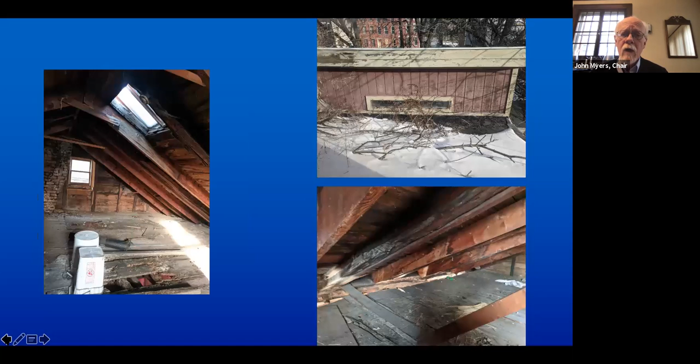Was any consideration given to limiting the demolition to the rear portions, which are certainly well beyond any sort of reclamation, with the notion that the original front section could be, I guess, stabilized and then marketed?

Unfortunately at this point, because we already did a stabilization, doing a partial demolition, and since both the front and the rear of the building really are greatly affected, I think that front facade becomes something that's insurmountable for most people when they look at it. We don't believe that would make the difference to give this a viable pathway.

Okay, I'll ask other commission members to comment on the application.

How often does the land bank inspect its properties? It says the roof hatch was open and not closed in the winter of 2018, and not closed until spring of 2019. Does the land bank look at its properties regularly?

Yes, we have a regular schedule of going through properties. I'm not sure where those exact dates came from. Obviously, if we're made aware of a situation or we find something, we would correct that immediately. We don't have any intention of leaving those things that way.

So we assumed that there was deterioration from the winter, but that's not necessarily an exact date. But what did happen at winter is we did bank these properties to look at possible projects for a larger section of the south end.

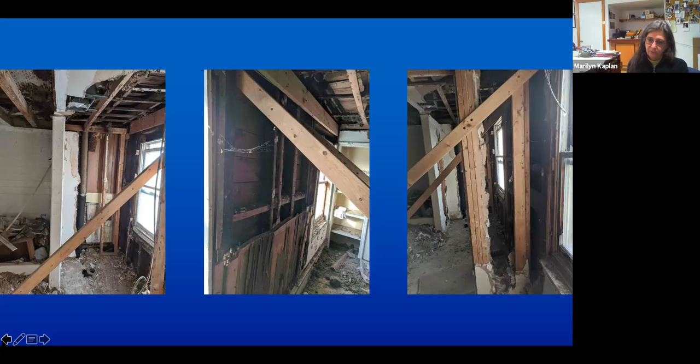Because if you had a $150,000 project here, and you were able to use some of those funds through the South End Improvement Corp, there's $80,000, you had $50,000 from the city, you've got some tax credits, all of a sudden you've got a project and you've got some assets that the owner is building up.

I can speak to that spread, and that is exactly where it comes from. The lower end is with the sense that an individual would take on this building and go down that path where they put together different resources or even their own resources. The higher end of the spread comes from our experience when we pay for things. Unfortunately, the reality is if the land bank does it, it costs more money. That's just what happens. We understand that. And we know that if we do a full rehab on a building, it will cost us more money because we have a higher overhead.

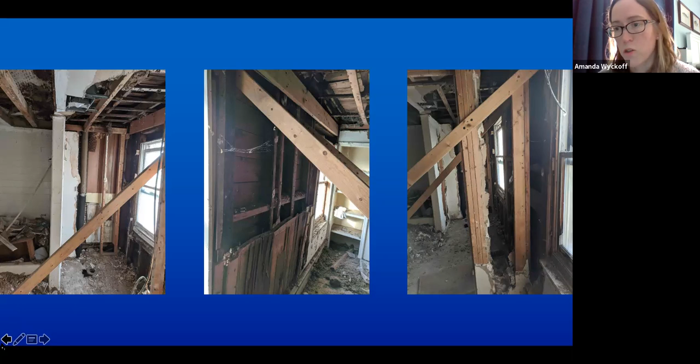We're going to be hiring a GC to do it. We can't do all of our construction project management in-house. So if we were to do it all the way to the finish line, we're going to be at that higher end. But if somebody else can take it on, they can do some of it sweat equity, do some of their own work themselves, and not have to go out to bid in the regular market, then we agree it could be done cheaper. But we don't have that person, we don't have that partner to walk that path with.

Do you have to pay prevailing wage rates on your projects? We do not pay prevailing wage, but our projects consistently come in more expensive than what other folks can do. They're doing a lot of their own project management, or if they even do parts of the job themselves, they can save a lot of money.

Has the land bank done... I get that what we're looking at from CTML is a prioritized conditions assessment. I believe Historic Albany worked with you maybe on a conditions report. Are you in possession of a prioritized rehab plan or condition report with priorities for repair?

Because I'm going back to, I don't know, it'd be interesting to know how much was spent on this temporary stabilization on the interior. You're looking at the demolition cost, and to Marilyn's point, this was a little bit of the issue systemically, which I know you're not responsible for, but we're talking about full rehab cost. Has the land bank done anything besides this temporary stabilization, which isn't going to help a future owner, to improve the condition of this building, to invest something to stabilize the building somewhat?

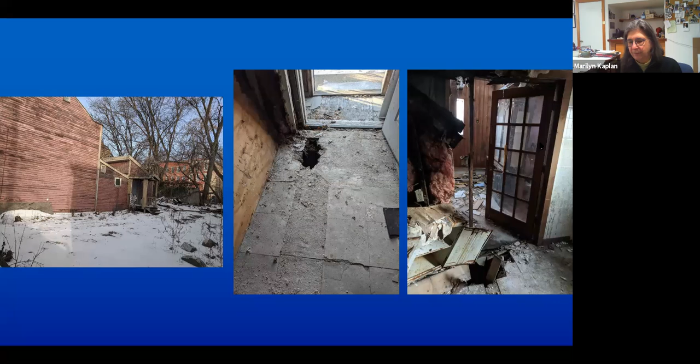It's just a recurring problem, and I don't think I'm ready to let it go based on the information I have in front of me. I think we can do better collectively, and I don't think we're there. I think we're just working too independently and too narrowly. It's a real problem for you all, I get that, but that's a lot of money to demolish a building, and then we don't have the building. So how else can we maybe use that pretty substantial amount of funding to get us over this hump?

So I guess I have a motion in there. I don't.

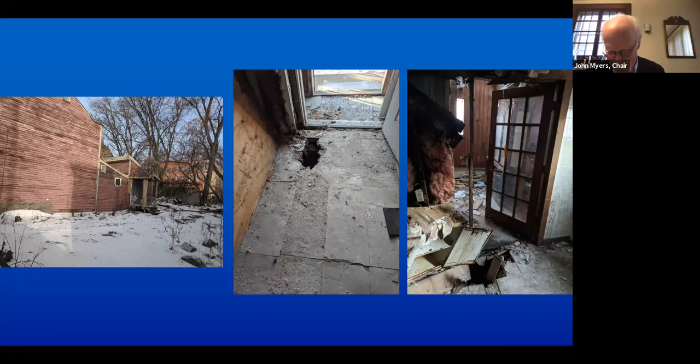I would just reiterate that we are always more than happy to work with anyone and everyone. This was part of a walking tour we did with Historic Albany, as an initiative to come up with other ideas. We're open to ideas. If someone is interested in this building and wants to take it on, we can start that conversation. But at this point, we've had no one step forward.

I think what I was hearing from Marilyn, and what I feel too, I want to second Marilyn's appreciation of your work and your job. But I think it's clear that what's been happening with marketing this building is not working. So to her point, look at the cost of demolition that the land bank was going to invest, and what can be done, because leaving the building as it is, it doesn't look like anyone's interested, and doing something to fix the ongoing dynamic deterioration that's occurring.

Is there something that can be done? Is there a resource that we here don't know about that can help solve that internal roof drain problem? Can you put a new roof on it? Can you get into the building? I understand there's unstable floors, but can you clean out what you can clean out? Make it presentable and invest money in something longer term, rather than bracing that will eventually have to come down and add to the cost of whatever the future owner will need to invest.

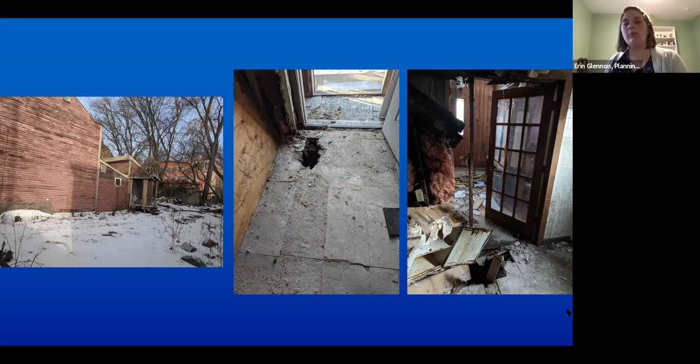Interesting. Erin and Brad, what about the vacant buildings funds that the city has, through ACDA? That's the one that I know of. I don't know if there's any other sources. I know that they have it. Do you want me to talk, Erin?

Go for it, Faye. Hi, it's Faye from ACDA. We have 2 grants remaining for that program, but it's not a stabilization grant. So if somebody applies to us for funding to use that $50,000, they have to be able to show they have the remaining funds available to restore the building to a livable situation.

Well, we need to move this application to some level of conclusion here. Somehow it's made it through the winter, so there's some time. I'm not sure what the emergency is that it has to be torn down in the next week or so.

I'm sorry, are you asking the question? I'm just observing on it. Does it need a vote, tear it down right away? Or do we have time to look at this a little more?

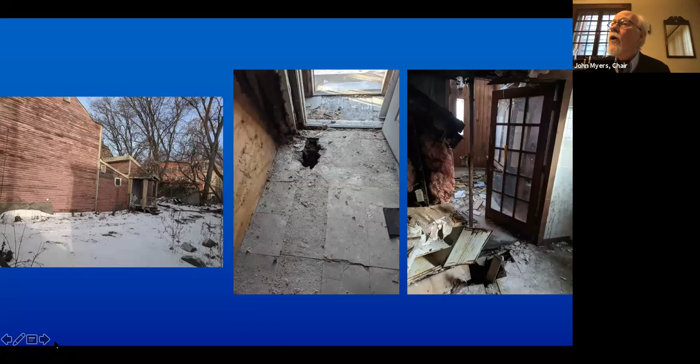Okay, the next item on the agenda is 78 Clinton Avenue, 133 Clinton Avenue, 303 Clinton, and 307 Clinton. The Home Leasing partnership certificate of appropriateness for the rehabilitation of the 4 vacant masonry structures.

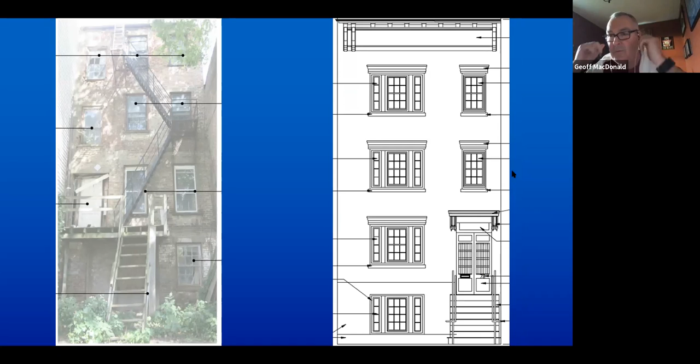The front stairs will be replaced. One of the big topics you may recall from last time is the windows. All these windows, contrary to the original project, are the original wood windows on the street facade, and we will be retaining, repairing, and restoring them for this project. These buildings are all going for tax credits through SHPO and the National Park Service.

I think Aaron's scrolling through — each building is either 4 stories or 3 stories with 3 or 4 units each. That's in essence the gist of each of those. In the packet, there are also facades on the back that we're going to handle with replacement windows. I believe the committee was okay with that last time.

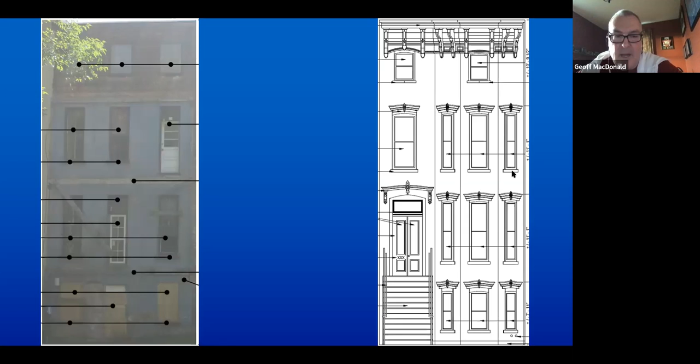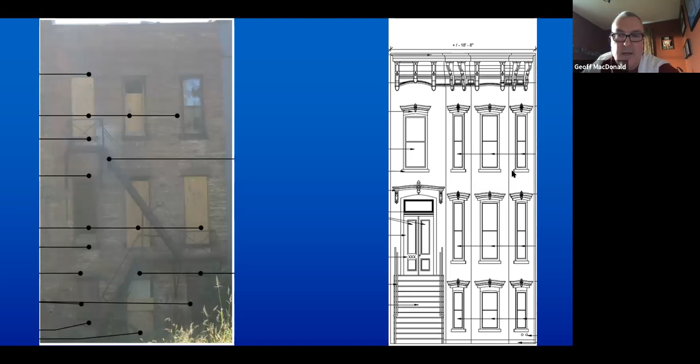In some cases we have to demolish even part of the existing structure because it wasn't original to the building and is in terrible shape — removing the existing fire escapes, as shown in the pictures on the screen now. I know I went quickly, but that's about the scope of work at this time. We'll obviously work with you on the paint colors, which will be original or relate to the historic fabric of the building and the street.

It's certainly encouraging to see the restoration of this large number of original windows. Yeah, they were in pretty decent shape. We obviously have a preservation consultant recommending this to get our tax credits — we're going to need to do that.

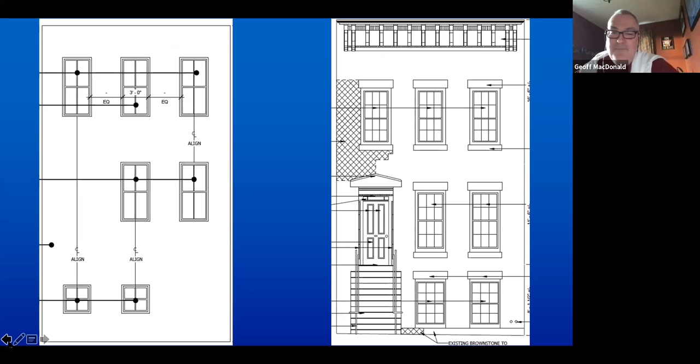In general, hopefully you guys have seen the original project — even the painting and the work done on those is really a stark improvement, looking quite nice. Yeah, we're pushing to get done. What's the status of these now relative to the state and the Park Service?

If I speak out of turn, let me know — I know Part 1s are in. I believe the Part 2s are in, or if not, they will be shortly; they haven't reviewed them yet. Okay, we can get those to you. No, I was just wondering if those reviews were complete.

Oh yes, sorry, gotcha. But you're suggesting the scope of work for each of these is very similar to the other 70-odd buildings, with the exception that we've got more original windows here. Correct, pretty much identical.

Also, on these 4 buildings, you're replacing the wood stoops or the wood stairs. Correct. And are any original railings being retained, or are they all new railings? I believe they've already been replaced — if I should know that, John, I apologize, I'm looking at my drawings on my other screen. If they're original, we'll certainly try to keep them, but I believe they've been replaced.

So those were replaced in the past — sorry, and these will be all new if I misspoke. Right. Aaron, do we have stair profiles, details, and examples of railing for the project, just to verify the detailing of the stair and appropriate nosings and that sort of thing?

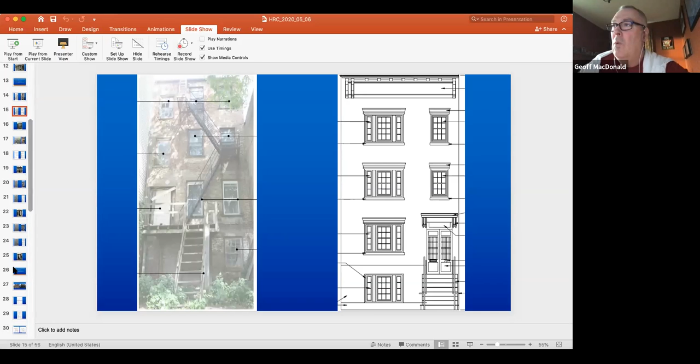So why don't you bring up 165. 165 is a little bit of a different creature, though we are going through the same process in terms of national park tax credits. The exterior will be maintained as is. We're calling to repoint and basically restore and renovate the whole masonry facade.

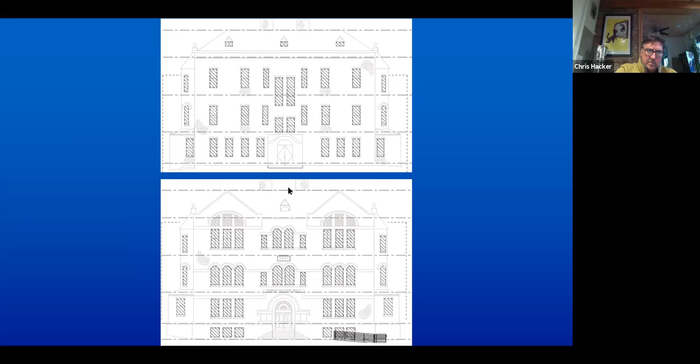You'll see one thing I'd like to talk about, where railings may come in. We do need to provide handicapped accessibility, and we actually considered it a plus that you can see on the image on your screen now. There's some railings down at the bottom right corner, providing access to the basement. We're also providing an elevator within this building. This building is 3 stories with a basement.

It's not a huge footprint. We'll be providing 12 units in there. Even the inside is a center stair, and each of these units incorporate the existing classrooms, which are kind of open spaces. So we've tried to utilize the building the best we could, take what it has to give, as we say. But you can see the railing, back to the handicap accessibility.

We thought this was a good advantage that we're not plunking a huge ramp on the exterior of this building, that we're able to recess down into the sidewalk and come around the side of the building to get in at the basement level to access our elevator. You can see in that same elevation at the bottom of the screen how many steps there would be to get into this building. We weren't even sure if it was going to be feasible, and we discovered this access, so it's really worked well.

Now those railings, I think we need to be in context. They'll have to be new, but we can get an ornamental style, historically appropriate railing that we would provide at that location. And then I think the next topic would be the windows.

Now, the difference with this building is these windows have been removed. The original windows have been removed and replaced with an aluminum replacement window. What we're proposing here too is to come back with a aluminum-clad wood window on this building, same profile, same arches, same look that the building has now, but just in aluminum with a wood interior, insulated modern window.

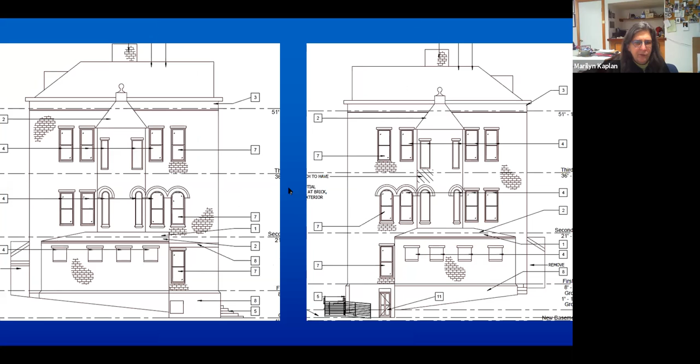About the windows, one question: you've got square head windows into those arched openings, including on the south facade. That's not what's existing now, right? Is there any reason? I know they're more expensive.

And I guess a couple questions on that. One is, can you save the original windows that are there, since they are arched head? All the windows there are aluminum replaced, and those that appear as arch heads are actually square on the interior. They don't fit the arched openings.

So they're in behind the brick. Marilyn, if you go by the property, you can see the windows don't conform to the fenestration opening. As Mike said, they're square tops set behind the actual original plane. Well, it's not what it looks like on my little laptop. I'll go by and look.

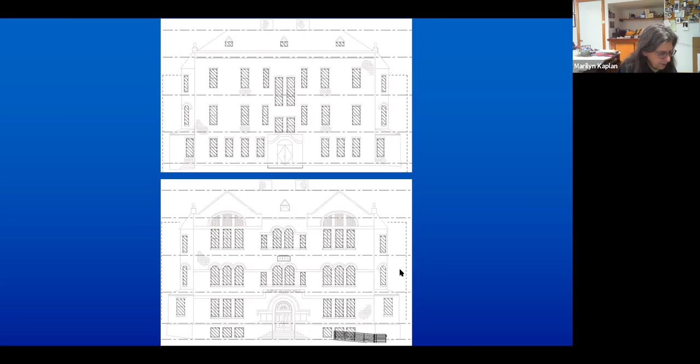Can you zoom in? I can't. Yeah, you're on a PDF. I can, but it looks like they're round head in my viewing. They may, just to be clear, and Mike might know this - we've looked at it, but the front ones might actually be round. On the side, they're square. The goal is to replace these with round. Last we spoke to the owner, maybe Adam can confirm, but I believe that was the game plan.

That's good, but that's not what the elevations show, correct? The front does, I think. Maybe it's misrepresented - it looks a little odd on the side. It may just be a graphic thing, honestly. We can confirm that. I've got a close-up photo of those arch openings, but since we're going back with true arch tops, I don't know that it necessarily matters that the replacement windows don't match the openings.

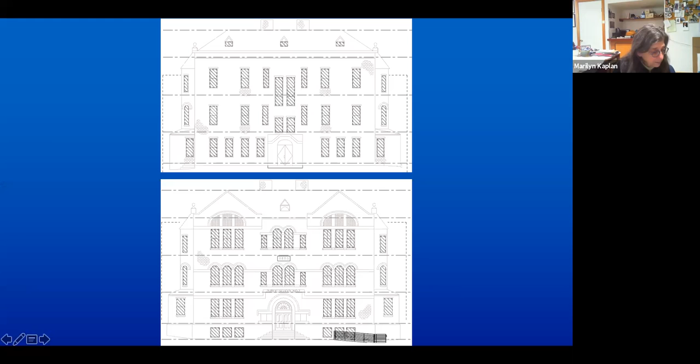So the front elevations, the arched openings will be maintained, yes. That's not what I'm looking at - what sheet? I gotta zoom back out. A200. It's not, maybe I'm reading it wrong. Those look square head to me. You mean that little line? It may just be a graphic.

Let me just check that. The other question I have for you - I think the reference would show up on plan, but I don't have the plans. What about the vents? What's the heating per unit? Is that why? Yeah, they're separate units, we'd run everything up through the roof.

Again, we have to deal with National Parks and SHPO - there'd be nothing exposed on the facade. So the small new exhaust vents added to most exterior walls - it said I would pick it up on the plans, but I don't have the plans. So what does that mean? Small new exhaust vents added to most exterior walls. Oh, you're looking at an elevation - your general exterior scope of work notes.

That may have been a rogue note that slipped through. I'm gonna have to fire somebody for that - she might be listening right now. Sorry, which note was it? A200 general note, number 2.

You might be looking at an old elevation, actually - we updated these, so that may have slipped through. You may not have this updated version; I apologize, these are May 1st. Oh, demo - you're looking at demo. No, well, I don't know. It says north, it's A2. My 200 doesn't say that - my number 2 on my A200 says fire escape to be removed.

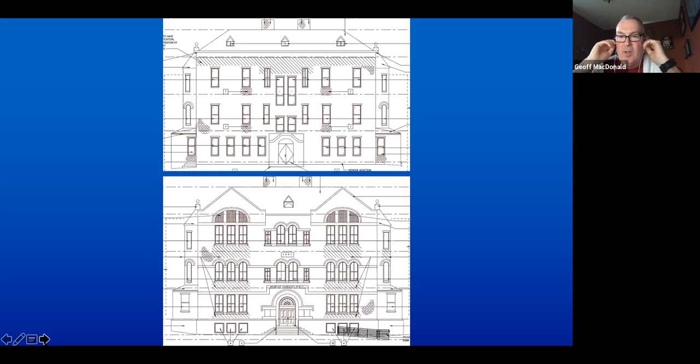So no, there would be no vent - the short answer is there'd be no added new vents on the exterior of this building. I think what Marilyn is referring to is not the keyed notes, but the general exterior scope of work notes, number 2: small new exhaust vents will be... Oh I see, yeah, no - that's a general note that should come off of here. Apologize, it's applicable elsewhere, being general, it slipped through.

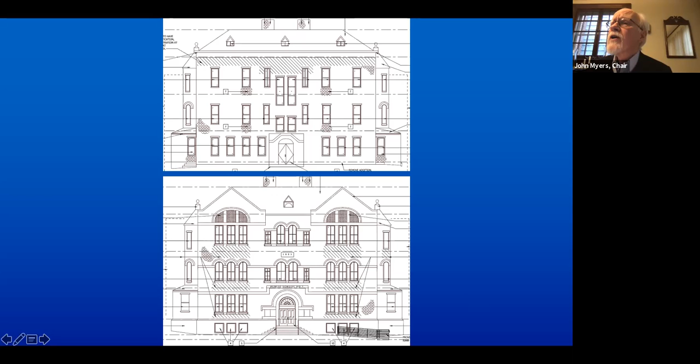So are those vents being gathered and sent up through the roof of the back building? Yes, correct. And there's actually a flat roof on top - another opportunity too, there's those two brick chimneys you see that are wide open and unused. We're thinking about using that for duct chases to do that kind of work.

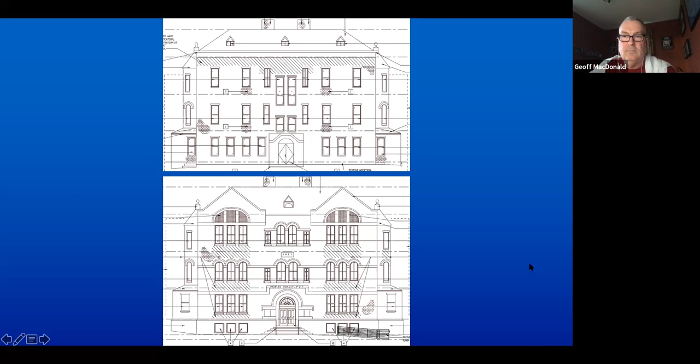Any other questions? The schedule on these, like the other ones we saw, the part twos haven't gone to the state yet?

I believe so. Mike, can you confirm? That's correct. They're still drafted, but as we've been issue spotting while the drawings have been developed, we've been consulting with SHPO to make sure we've got the cleanest submission when it's formally submitted.

What will you typically do relative to taking on the exterior construction in this case, or any construction, relative to just having a preliminary part two approved, or do you go ahead and keep your fingers crossed? What in general have you done relative to the proposed works, the part twos?

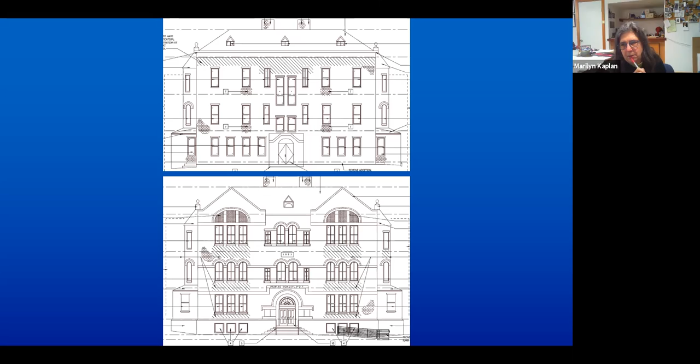Is that for me? Mike, correct me if I'm wrong, but I think we've done enough work with them that we'll proceed with our best understanding. With Mike's guidance, there's nothing... well, to say there's nothing, we have a pretty good understanding of what their expectations are from us, and we'll proceed in that manner.

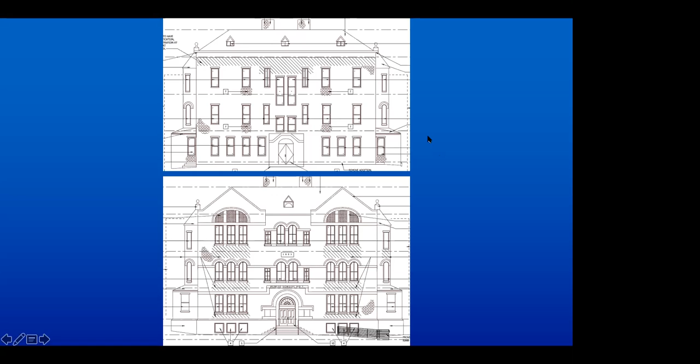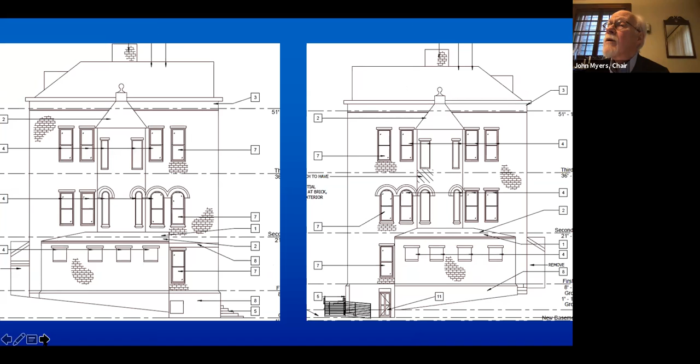But Marilyn, I don't think I understand the question, can you rephrase it? And those arched openings... That's right, I was looking for that. So all the new windows in the building will fully fill the masonry openings, correct?

And be set at the plane where they currently sit. Yes, okay.

And all of the areas of repointing, have you done mortar analyses and are matching the mortar? We haven't done it yet, John, but we will. It'll match the mortar color, makeup, have the sand tested, and same composition and strength. Yep, you got it.

I believe it's cement, which surprises me. I thought it would be lime putty, and it may be actually, but we'll have to get it tested.

Was the building painted originally, or was it stained? It looks like it might have been stained, and were the joints a red stain as well? I don't think it was stained - on the brick, I think that's just weathering. Don't believe it was stained. Mike, you can correct me again if I'm wrong on that too.

It does all need to be repointed. Some spots it isn't so bad, other spots we're losing mortar. Yeah, it looks like some foundation repointing is in order too. Or some stone replacement in a few spots.

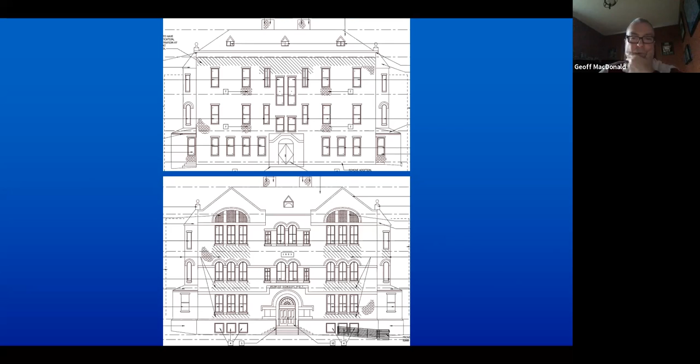Aaron, would you go back to that south elevation? The photo? Yep. Oh, you can't zoom in.

Mike, did you not see any evidence of red iron oxide staining or anything? Is the mortar tinted? I didn't see any evidence of it when I was on site, but I could have missed it. Looking at the photo, from the 1880s or whatever, it sure looks like the brick might have had a red iron oxide stain, and or the masonry have tinting. I'll have to look at it. Have you looked closely at that? Do you have that all figured out yet? I have not.

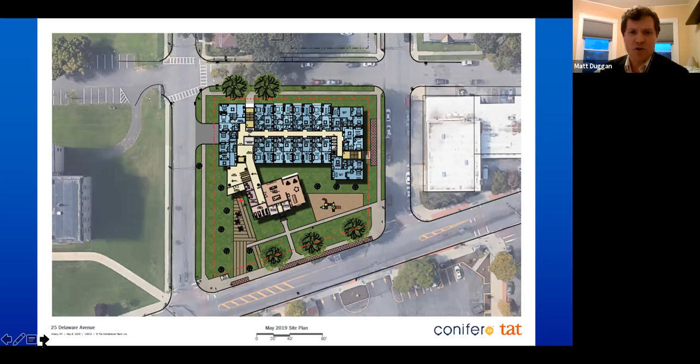So if we go to the second image, you can now see, or go back one, the site plan of the revised scheme. The big move we made was to reimagine how you entered both buildings. Instead of having a link building connect the two and provide an accessible entrance to the fire signal building, we're now entering the fire signal building from the west side, which is historically the rear of the building, and entering the new building from that same path. So essentially right down the center of the block we're creating a new path accessed off Morris Street, with an entrance into the residential building.

And as you continue further down, it would have an entrance into the fire signal building. What we're now providing is our accessible connections between floors will be within the existing fire signal building. Another thing you can see from this site plan is that the playground, previously shown on the front lawn facing Delaware Avenue, has now been tucked between the two buildings, essentially in the location where that link building was previously proposed.

Another important change you can see from this image is that the overall footprint of the new building has been reduced, one by eliminating the link, but also there were specific comments from the commission last year that the old design was actually a bit of an L-shaped design, coming along Morris Street towards Delaware Avenue. That has been eliminated, although that area is now where the entrance is shown.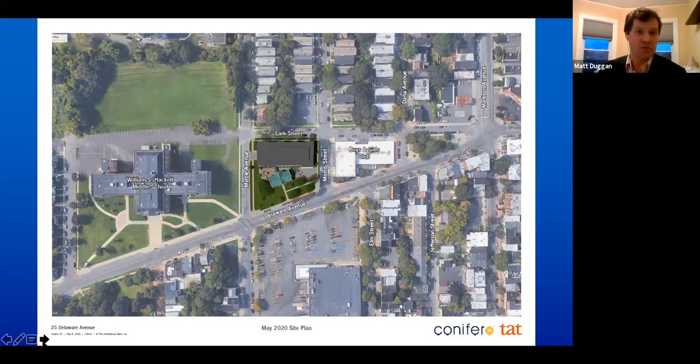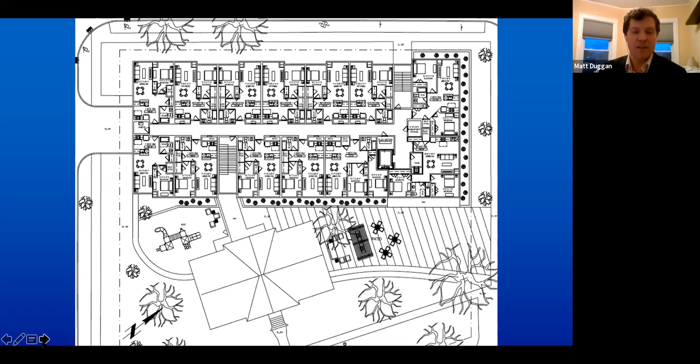The next image shows the 4th floor of the building, so you can see generally how it lays out. The elevator has moved over to that entrance, and there's an open covered connection roof, just a canopy, connecting from a secondary entrance of the residential building to the primary entrance of the fire signal building, which we'll see further in a perspective view.

If we go ahead one more slide - this is the corner of the building from the previous design from last year, right from Morris Street by Delaware Avenue. You can see the playground was previously in that front lawn, and you can see the L-shaped leg of the building.

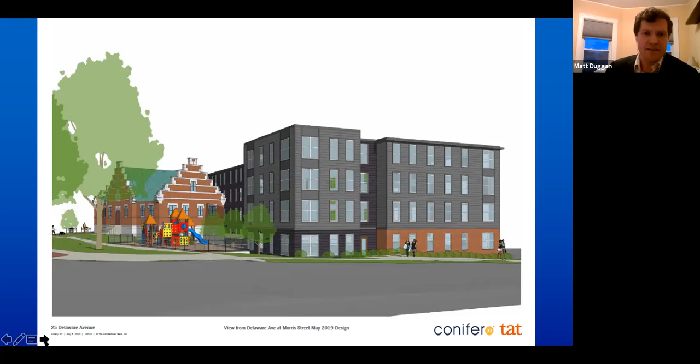If you go to the next image, you can see how we've redesigned this end. From here, the Boys and Girls Club is just to the right, and if you zoom in a little further, you can go forward one more and zoom in right to the entrance.

So we're on Morris Street, and this is that mid-block path I was talking about. To the right, that is the main entrance to the proposed residential building. You can see a decent amount of glass on the ground level, as well as brick, and that is where the leasing office and management office would be. A little further down, you can see a double set of doors that look brown, representing wood and glass - that's the front entrance to the building. The fire signal building is to the left there.

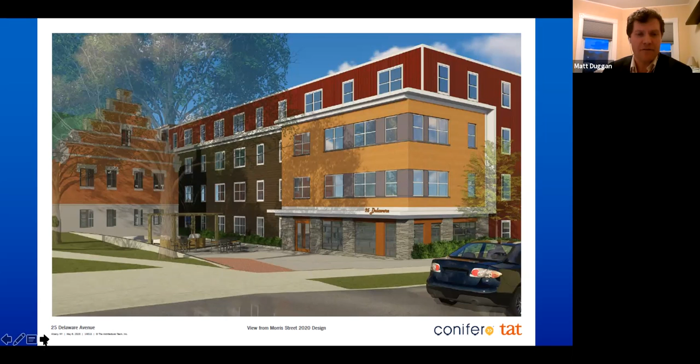Go one more forward. May I interrupt for just one moment?

Erin, did you call Erin Tobin? Yes, I did, she's back on. Oh okay, I'm here, I'm sorry. All right, you're hiding off the screen here. Okay, please resume, I'm sorry.

So what's proposed below is a parking garage, and that parking level is exposed on Myrtle Avenue and right at the corner of Lark, so that vehicles are able to drive directly in without a large ramp. What you can see to the left, again that kind of orange colored zone, is that front entrance we were looking at in the previous slide.

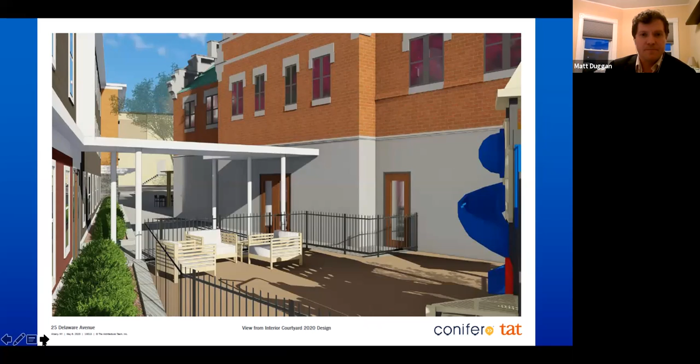So here are the elevations of the building. You can see the upper right corner would be the east elevation from Delaware Avenue, so you can see the fire signal building in the front. You can see here that it really presents itself as a 3-story building from Delaware Avenue.

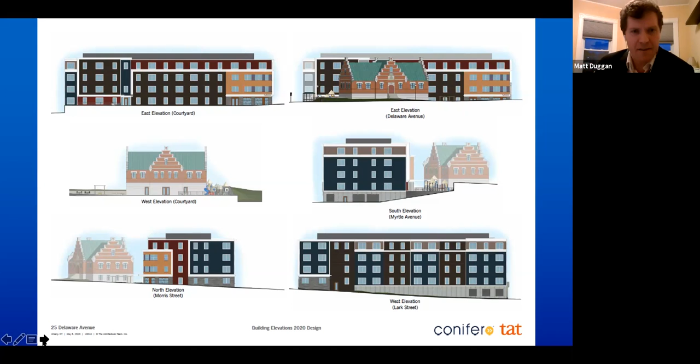Just to the left of that is that same elevation, but now cut through what we're calling the courtyard or the internal path. You can see where that blue section is and where the banding drops down 2 levels. That's the secondary entrance into the residential building, which is directly opposite the accessible entrance into the fire signal building. Just below that is the west elevation of the fire signal building.

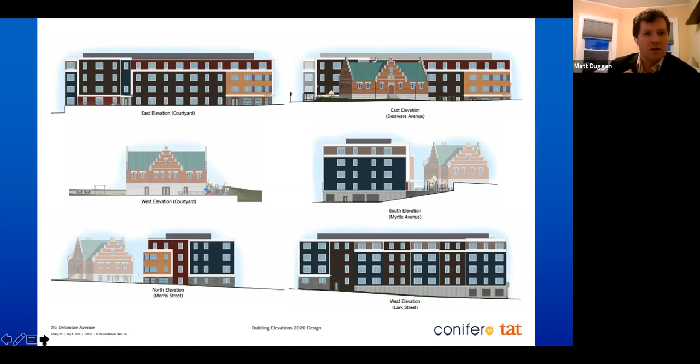And if we go to the next image, I'll talk a little bit about how we came up with what the back of this building should be. So here is the back of the fire signal building.

As I said earlier, there previously was a second building on the site, and this backside is where there was a connection, a link building between the two buildings. So you can see the backside is no longer what was originally built, and we don't have an exact idea what was originally built, but we have some clues. When we go to the next image, I'll start to talk about it in a little more detail.

So the ground level, we're keeping pretty simple. We think the ground level probably was pretty simple, considering that it was down the hill, and there isn't really any physical evidence that survives of fenestration there. So what we're proposing is essentially 3 doors. The double door in the center would be the primary entrance into the building, or at least the primary accessible entrance into the building, and we're using that gable to really be where the building wants that entrance to be.

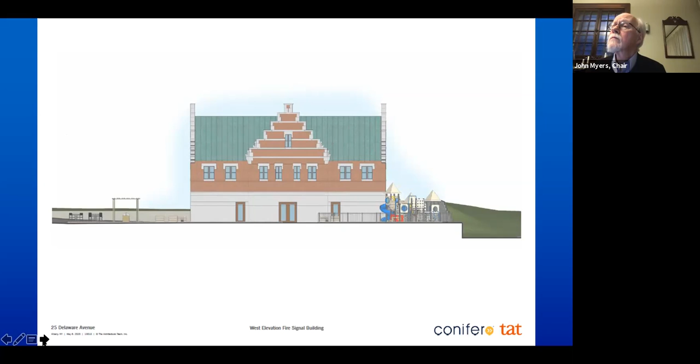You can see on the upper level that from the previous photo doesn't exist, so we took our clues from what's happening on the other side of the building. Essentially we have 2 windows that match what's happening on the Delaware Avenue side. And on the gable section, we are showing 4 windows, which when we go to the next image, you'll see that's what all the gable ends show. They have 4 windows, so we took that as a clue as to what may have been there in the middle, which we don't honestly know exactly what was back there.

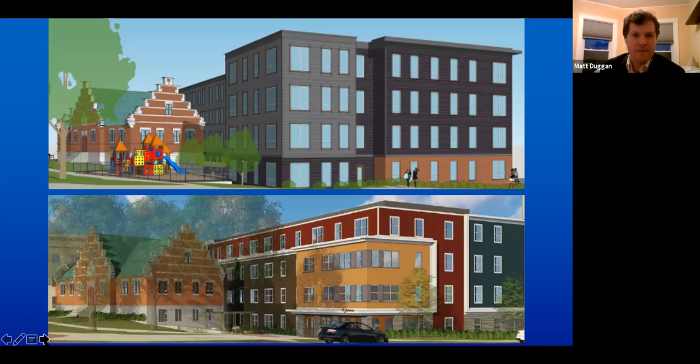So here are just side-by-side views. Top is the scheme from a year ago, bottom is the current scheme. Again, top is the previous scheme, you can see that link building.

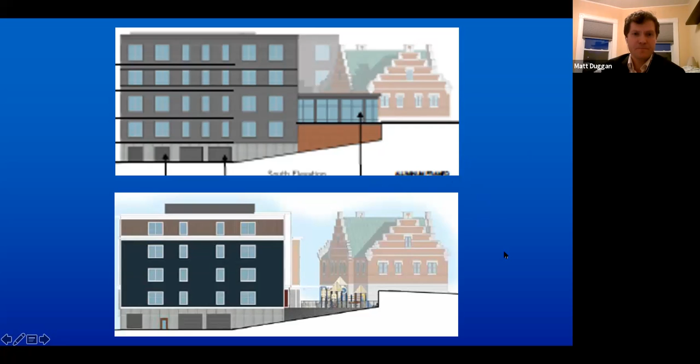Well, I certainly appreciate all the effort you've gone to, to take some of the comments that we had offered in the previous review a year ago and take them to heart, particularly the removal or the dramatic shrinking of the return at the north end of the building that seemed to wrap the end of the fire signal building. And it's cleaner in that you don't have the hyphen connection now, that it's more of a grade level entry to the fire signal building.

Has the fire signal building and the work that you're proposing to do on it gone to SHPO for review? So the overall presentation that you have seen has gone to SHPO, and they issued a letter stating there was no adverse effects to the fire signal building. And in that letter, they then stated that they would like the fire signal building to adhere to the National Park Service's standards, I believe is what the letter said. Yeah, they're just looking for more detail on the fire signal building. Yes, I did see the no adverse effect.

And then we have subsequently sent them floor plans of the interior to show them how we are proposing to add a stair to connect the two levels and a handicap lift. So I don't believe we have heard back from them on that, but we have sent them that package as well. We did get an initial response from them. Again, what we sent them was fairly schematic, so their response was, 'We've received your submission, send us' — basically they're looking for almost construction level drawings, which we just haven't generated yet.

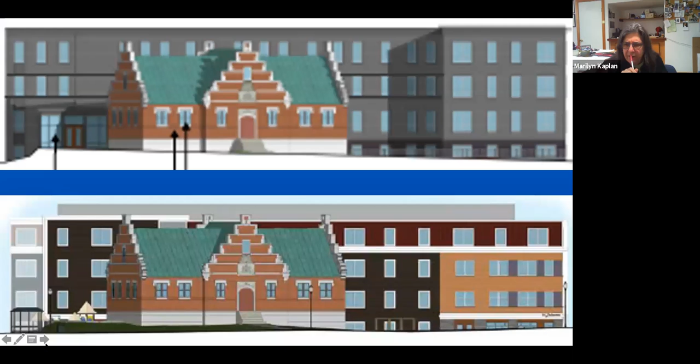How many units were there when we saw this a year ago, and how many are there now? So last year there were 34 1-bedroom units and 18 2-bedroom units, for a total of 52 units. This is now a total of 51 units, but the 2-bedroom count dropped from 18 to 11. So that's how we were able to shrink the building quite a bit.

The overall building has shrunk by almost 15%, and the footprint has shrunk by a little bit over 10%. So the building is a bit smaller, but the unit count is one unit less, with a different mix.

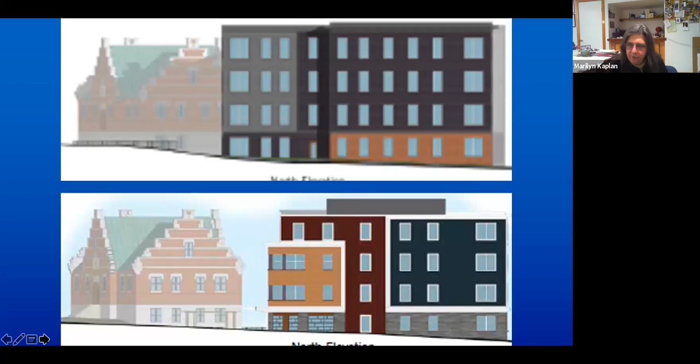Most of that — I'm still confused about the number of stories, because the application materials said that the overall height of the structure was reduced. So I think that probably most of the unit changes in the square footage, the footprint, is once that L-shaped leg was removed. When I look at these, has the height of the building changed, or have you just kind of stepped back a little bit at the edges?

The height has changed. Previously we had a floor-to-floor height one foot higher than we do now, so we took out a foot essentially on each floor. We did have 9-foot ceilings, now we have 8-foot ceilings essentially. So the building's about 4 feet less in height? Correct. Okay.

Can you describe some of the materiality of the proposed building? Yes, at this elevation you can see that gray color at the base - that would be brick material, and the orangey would be stucco. That's trying to relate color-wise with the fire signal building, but more with the Boys and Girls Club in materiality and concept, which is brick but has more of that mid-century modern sleek skin look, which is where the stucco is coming from.

The maroon color is shown as a vertical lap, or board and batten, and the rest of the materials are clapboard of varying different exposures. In some areas it has a 7-inch exposure, in some areas a 4.5-inch exposure.

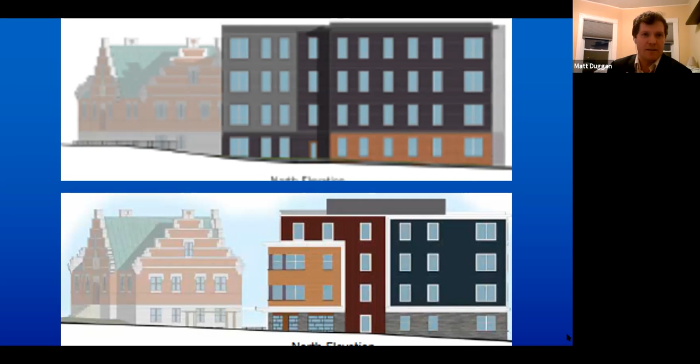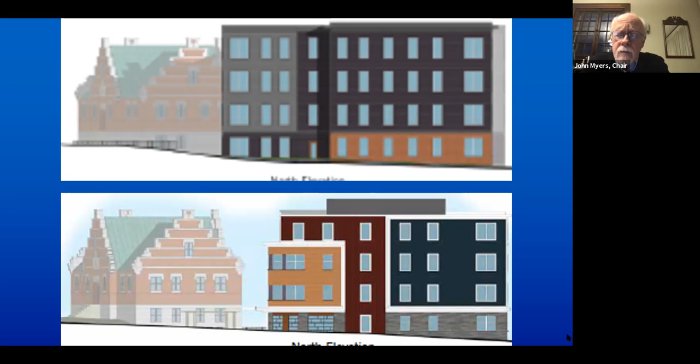I'd like to ask that we go back to our comments from the May meeting, because we spent a lot of time on it then, and there's a number of bullets. I think you've probably addressed all of those, but it would be helpful rather than starting again.

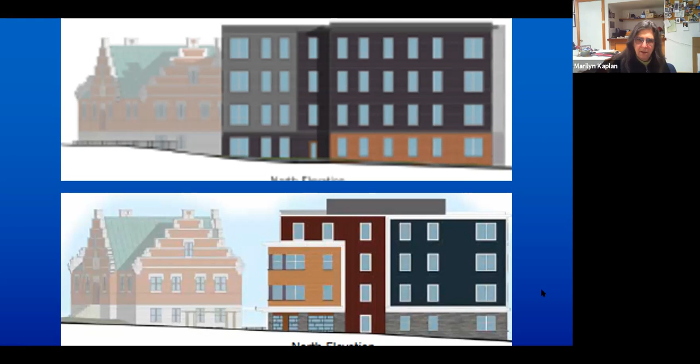Can you pull that up, Aaron? I guess it's the disposition of cases from last year. It's in the packet, but I do not have it in the presentation. Actually, give me one second - I've got it pulled up. I can read it. Okay.

The notes and comments presented on the concept proposal, May 1st, 2019. The below bullets reflect the feedback: 1, reduce the overall height of the proposed structure, remove the northeast projection, remove southeast entry and relocate entry to the northeast corner, add facade delineation. The new structure will feature horizontal lap siding, red and tan, board and batten, blue and tan.

Or is that? What are you looking at, John? I'm looking at something that instead says - hold on, Marilyn. Notes and comments, yeah. Oh, no, hold on John, I'm looking at something different. It's on page 60 of our packet. Right, hold on, give me one second. I was reading how they have responded to it.

Our comments: remove proposed brick and use a modern material, i.e. stone cladding, oversized tile cladding, cast stone panels, exposed architectural concrete, plaster, or stucco. Use a panel system or panel cladding rather than the proposed horizontal lap siding, or in combination with the lap siding, to provide more variety to the facade as a backdrop to the historic Firewatch building.

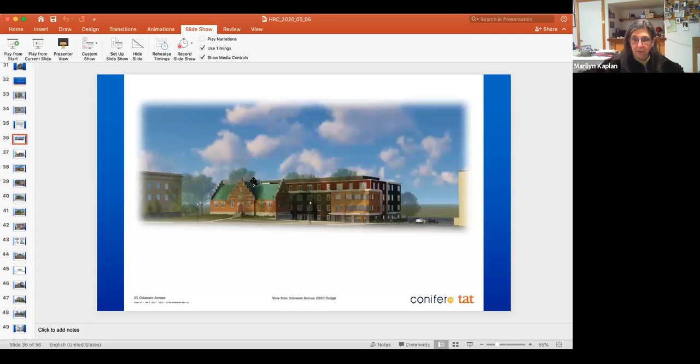I want to talk about the color, the many colors, which I think are distracting for the new construction. One comment: I don't find the CSI notes, or the master spec organized notes, that you've got to describe the work on the existing building sufficient. So I'd like to suggest we get full elevations and specs for the critical areas of the historic building.

So we can really talk more about the masonry treatment, the roofing, window treatments, et cetera. I don't think you've got that fleshed out yet and would like to see that. I think the conversations today are about the massing of the building and the overall project. I think a huge improvement has occurred by eliminating that northeast corner, the piece that was eliminated. I think that was a wise move.

I do want to say I think these renderings are a little tricky, and that the building is big, and the height remains on a small site. For me, it remains an issue for this project. I'm glad you stepped it back, but I think we'll all be surprised when we see it go up, that it's been shown to some of its greatest advantages in the selection of these points for the renderings, but it's a really big building, it's a tall building, and it's still taller than the existing structure, even if it's somewhat set back.

I am discouraged to hear that the New York State tax credits and any of the solar incentives aren't being used. That doesn't really make sense to me. You guys have done a lot of projects all over, we all know what it takes, we all know what Part Twos are and changes, so that's a little discouraging, but that's your call.

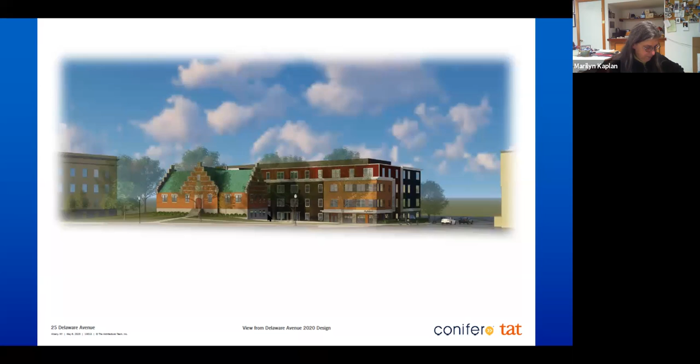This is Erin Tobin. I think it's so much better than what we saw a year ago. So I want to echo what the other commissioners have said. It is so much better. It doesn't look like it's going to eat the fire.

I'm a little concerned about some of the details, like what you mentioned could be PVC or fiber cement, that white trim that's projecting on the different elevations. I don't personally want to be a tastemaker in terms of the design of new construction, but it does concern me a little bit because these are all just details that are set up to fail in a way, because they're all protruding details on a historic building, or on a building that's going to be subject to weatherization, and I agree that it's a little distracting from the fire signal building.

So I would agree with that. I think the height is a bit of an issue. It's personally not the one I would fall on my sword on, but ideally it would come down a full story so that it was shorter than the fire signal building, if that was possible.

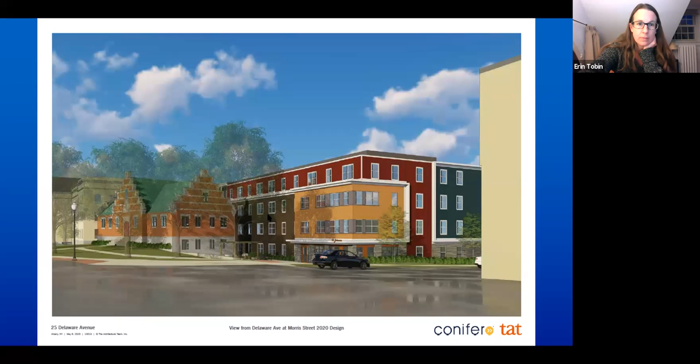I've already spoken, but I'll make one more point. The colors don't bother me at all. I think they put variety into it, and I like the corner building that's created, that's very similar in color to the historic building with that earth color of orange.

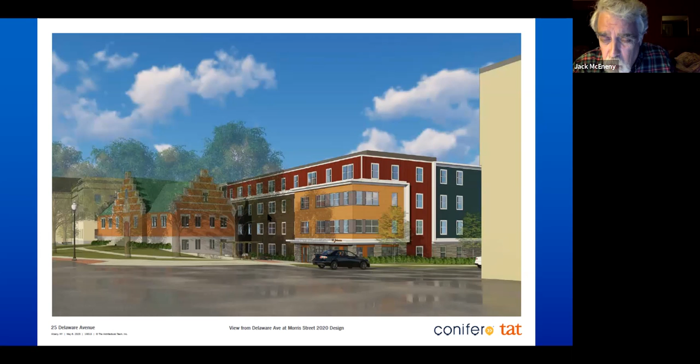I am a little bit... I'm a lot upset with the white lines. They're stark and they look like they're made out of aluminum siding. And I think that should be toned down, something more to a gray. I like the fact that they come out a little bit and act like a soffit of some sort, but to make them so shockingly white, I think would be wrong.

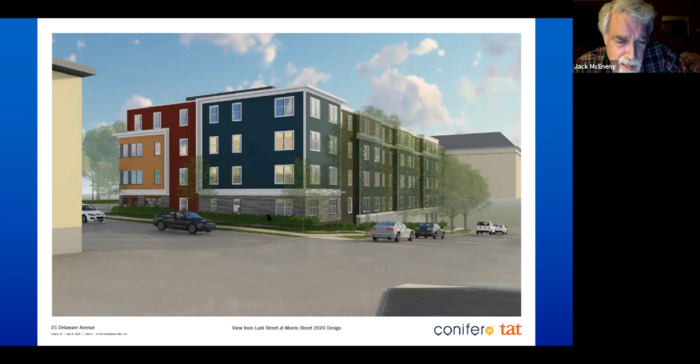It is to minimize some of the size, and that makes them stand out too much. Also, what I'm looking at now, which is next to the boys club, I'm not sure how the basement level, or first level depending on your point of view, goes as well with everything else.

I don't know, the part that looks like it's almost a separate orange or burnt sienna or whatever it is, the layout of the windows on the basement level, the fact that one may look like it's got blocks filling it, I'm not sure that's compatible with the rest of it.

And when I look at the stone base on it, and I'm sure it's not real stone, it looks more like what people like to do with kitchens, you know, the very vertical stuff.

I'd love to see what it really looks like, because right now it's a lot of vertical fill, like the type of things you see with housing renovation. And I'd like to know what that material is, because that's what people are going to see when they walk on the sidewalk.

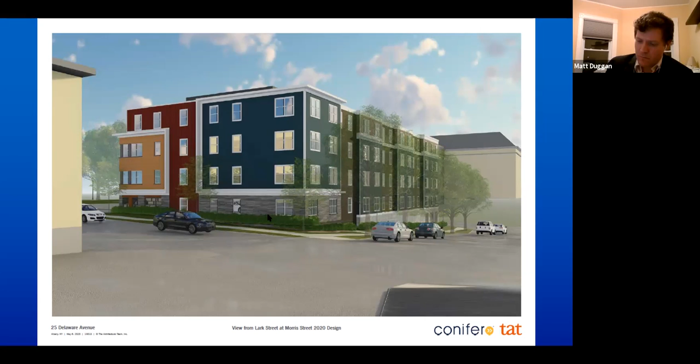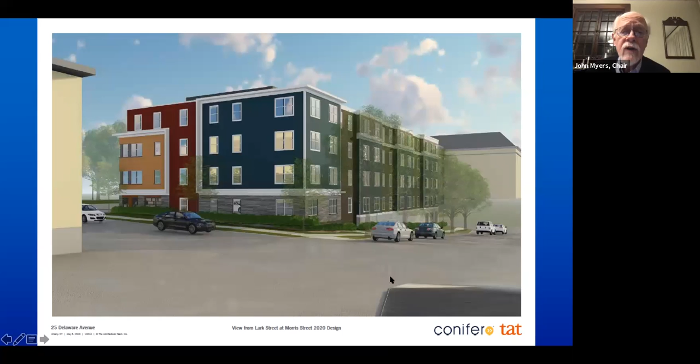How do I say this? Well, I think again, it's such a stark departure from what we saw before. I think it's a vast improvement. I think some of the exuberant nature of the wrapper could be toned down a bit, as Jack pointed out.

I'm not troubled by the colors, but when you do SketchUp models or things of this nature, you don't have a real large palette to work with. I think part of the process going forward, since this is concept at this level, is to look at materials, look at them on site next to the fire watch building, and make some decisions and judgments on that basis in the light of day to make some adjustments.

I think the massing of it works well. I'm not concerned with the height. I think you've gone to great lengths to reduce the apparent height, and stepping back the mass works reasonably well. I like the entrance at the north end, as opposed to the hyphen, which, although historically not an inappropriate way to connect to an existing historic building, had some issues. Creating that landscape zone between the back of the fire watch building and the new building creates a nice buffer and separation, and the fire watch building is now allowed to stand distinctly and proud on its own, not co-opted with it.

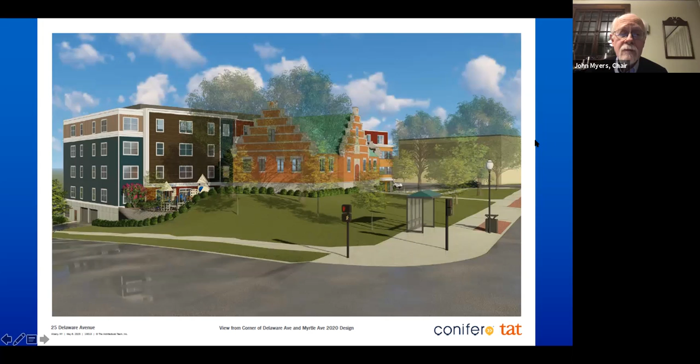Do we need to make a motion for this? No, this is just concept review. So they'll be coming back hopefully soon for formal review. They've done a good job, no question.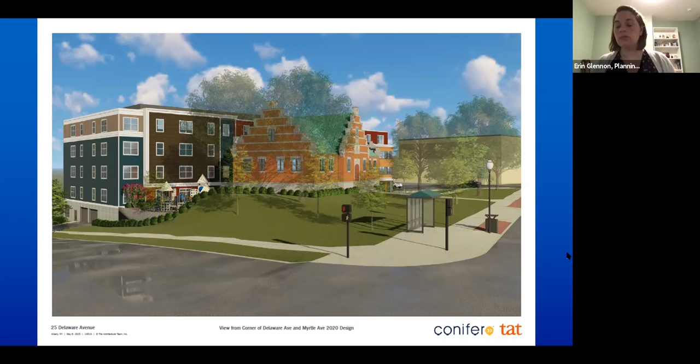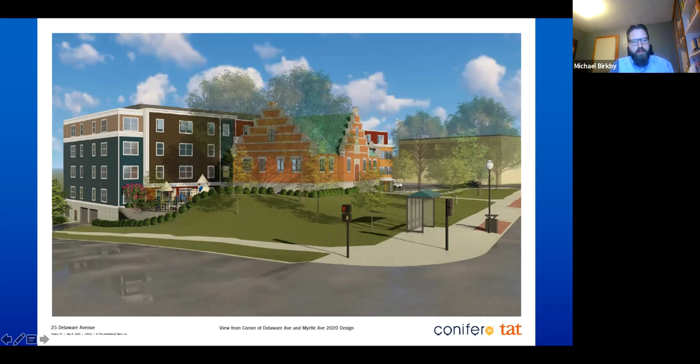Matt or Michael, do you have any follow-up questions for the commission? I don't, I think the feedback we've received has been pretty clear. We appreciate the positive comments on the work we've done, and we look forward to coming back soon for a formal presentation for a certificate of appropriateness, so we can continue this project along.

Okay Erin, I had a question about bringing physical materials along. I'm assuming we come back in June or something like that and we're still in the virtual setting, has there been any discussion on how you handle that, so we can start trying to plan for that?

Right, I guess one of the things would be providing the cut sheets. So if you have material specifications picked out, you could provide us with the cut sheet information specifying the reveal and profile, any type for stucco, finish information, texture information, colors. It's unfortunately going to all have to be digital, as we have no way of distributing physical materials or being in some place where there's physical materials. So that would probably be the best way to move forward, to just provide material specification cut sheets.